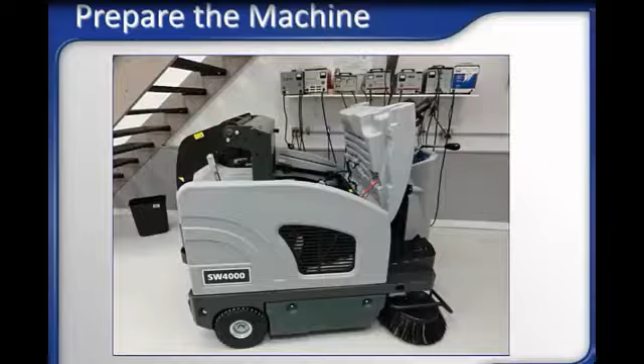If the SW4000 was properly stored, as will be covered later in this training, you should find the machine at the beginning of the shift in the following manner: machine parked with the seat propped up and the battery charger plugged into the machine, and machine reasonably clean with an empty hopper.

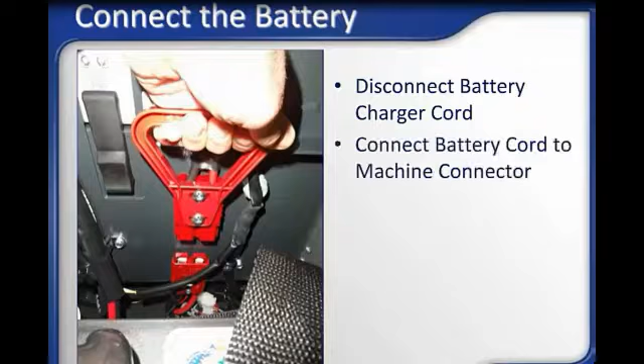Connect the battery for power. Disconnect the battery charger cord from the battery cord set. Connect the battery cord end into the connector on the machine as shown in the picture.

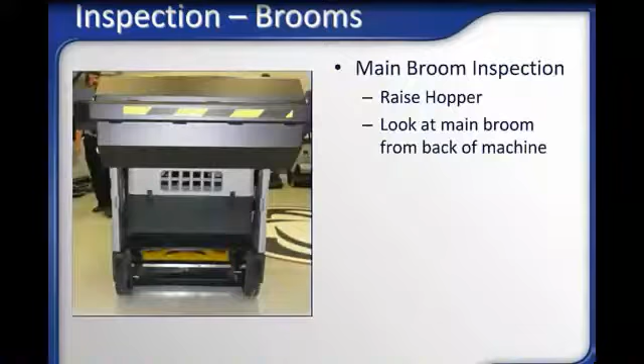The brooms are what do the debris sweeping work on a sweeper, so they must be in good condition for proper sweeping results. Inspect both the side brooms and the main broom. To see the main broom, raise the hopper and inspect the broom from the rear of the machine. To raise the hopper, you need to simultaneously press the hopper interlock switch on the dashboard and the hopper raise-lower switch just left of the operator seat.

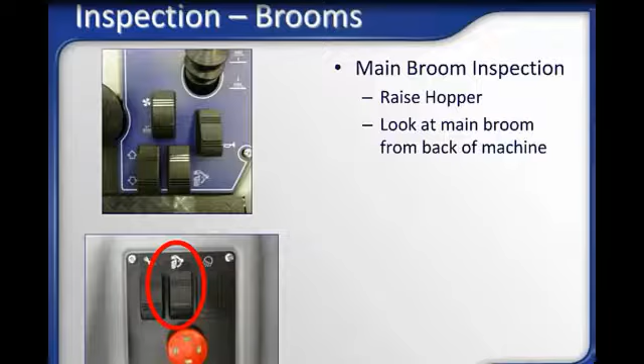Check all brooms for wear. The broom should be replaced when half of the original bristle length is gone, which is about 2 inches of bristle left for the main broom and 2.5 inches of bristle left for the side brooms.

Remove any wrapped debris from the brooms. If debris is wrapped around the broom, cut it out now. If heavily wrapped, it may be necessary to completely remove the broom to clean it off. Main broom removal is covered in the maintenance section of this training. Fully lower the hopper when broom inspection is completed.

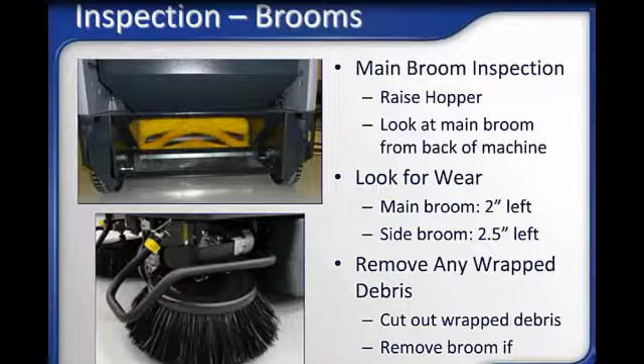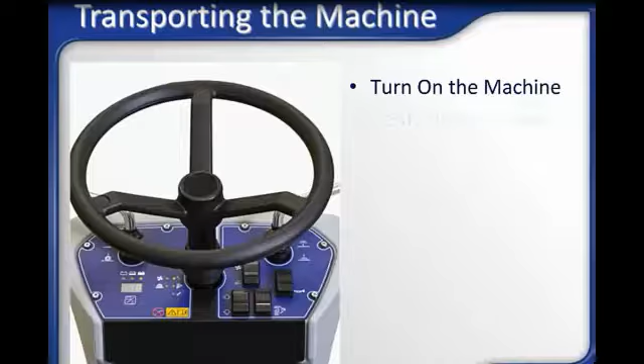Turn on the machine using the key, which is located just below the dashboard interface. Turn the key from the off position past the run position and release. Verify that the machine has enough battery power to complete the planned sweeping tasks using the control panel battery gauge. If fully charged, the indicator should be green.

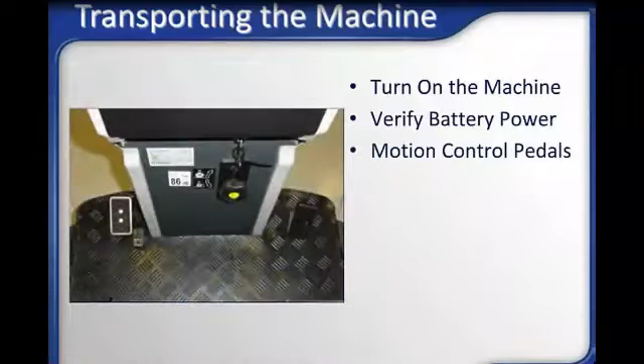There are 2 pedals on the floor of the operator's compartment that impact motion control: a brake with a parking brake function, and a variable speed accelerator pedal like in a car. The brake is typically only used for parking brake functions, but can also quickly reduce the machine's speed if needed. To engage the parking brake, press the brake pedal and engage the small lock to the bottom right of the brake with your other foot. To release, just press the brake again. Make sure the parking brake is released before trying to transport the machine.

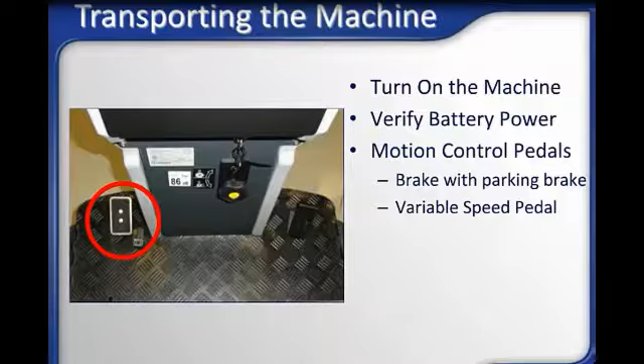On the dashboard is a travel direction selection switch. The default is forward when you turn on the machine. When in reverse mode, the machine will have an audible backup alarm sound. The SW4000 includes an operator presence switch in the seat that must be triggered by the weight of an operator to allow motion to begin.

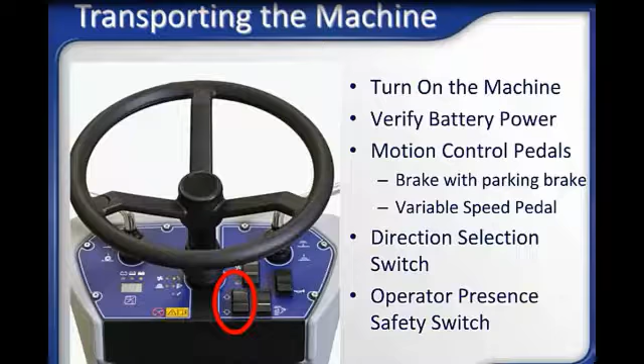Activation of the sweeping system: the SW4000 is designed to be simple and intuitive to use. The left side lever controls the main broom on and off. Pull the lever back to activate the main broom and push the lever forward again to deactivate it.

The right side lever controls the side broom on and off with the same on-off activation. The side brooms will not operate unless the main broom is also active. The SW4000 is designed with brooms-off-in-neutral functionality, which means brooms only operate when the machine is in motion, for safety, reduced noise, and increased broom life for lower cost of ownership.

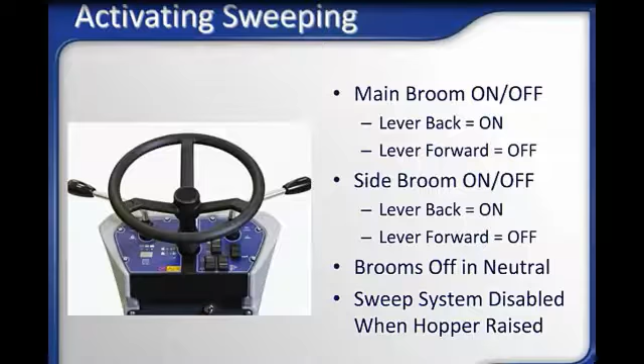If broom levers are in the active position, the brooms will begin operating once you press the motion control and begin moving. For safety, the sweep system will not operate while the hopper is raised. If brooms do not start as expected, verify the hopper is fully lowered. See the Maintenance section for adjusting broom height.

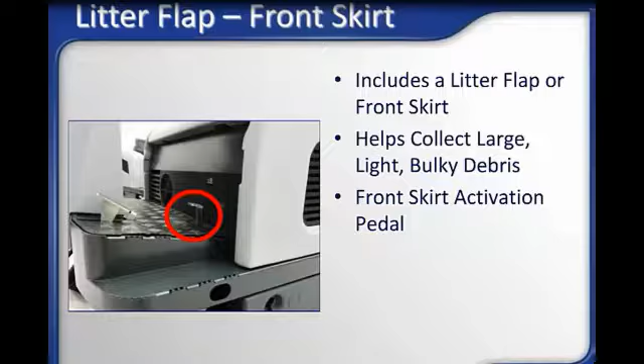The SW4000 includes a litter flap, or front skirt. This is an operator-controlled flap located on the front edge of the main broom chamber that allows the machine to more easily collect large, light, and bulky debris like leaves or facial tissues. There is a pedal just behind the brake that operates this flap. An operator should use their heel to activate this flap occasionally and momentarily while sweeping and before each turn to help capture light debris it may be pushing along.

Dust control: the SW4000 is designed with a vacuum-based dust control system. A switch on the dashboard controls the vacuum dust control system. The actual vacuum fan is located in the cover of the dust control panel filter at the rear of the machine. The default for the vacuum dust control system is on anytime the main broom is operating, since dust control should be regularly used.

The vacuum dust control switch can turn the vacuum off for wet sweep bypass, providing the ability to turn off the dust control vacuum system to prevent the filter from getting wet while sweeping in wet areas. Preventing the filter from getting wet will increase the life of the filter and greatly improve dust control when sweeping dusty areas. The same switch also controls the filter shaker.

It is a timed filter shaker with liberator functionality, which means multi-frequency vibrating systems for maximum dust removal from the filter, for increased airflow and better overall dust control. Activate the filter shaker every 10 minutes or so in dusty applications to help maintain good vacuum airflow.

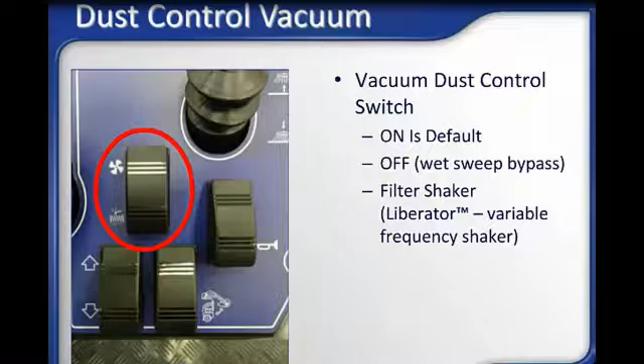If you experience poor dust control performance while sweeping, verify that the vacuum fan switch is turned on with the vacuum operating, and that the panel filter is in good shape, allowing vacuum air to pass through it. More about this will be covered in the maintenance area of this training.

Your machine may also include the optional DustGuard water mist-based side broom dust suppression system. This system consists of an activation switch, located just behind the operator's seat, two misting spray nozzles (one at each side broom), a water reservoir, and a pressure pump, which is internal to the machine.

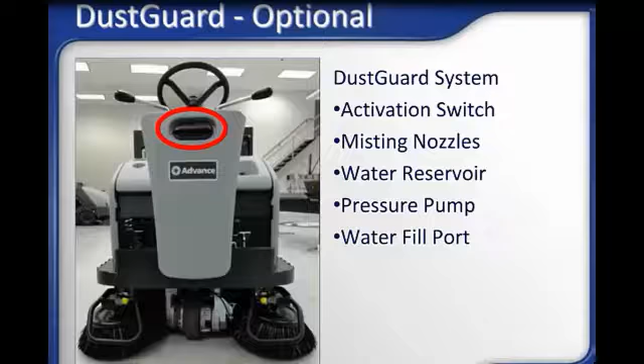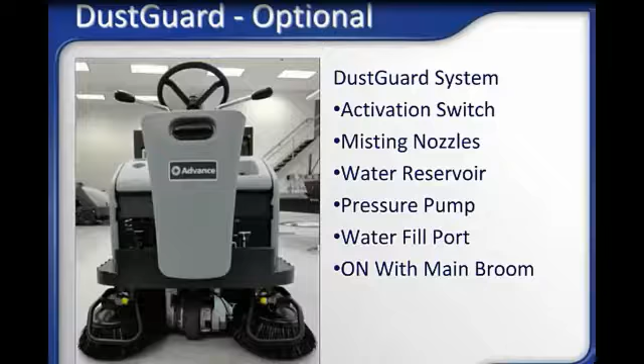Fill the reservoir with pure water in the indicated fill port. During sweeping, if the DustGuard switch is on, the DustGuard mist will start and stop with the main broom. If the misting tips do not spray an even, fine mist, they can be removed for cleaning. The tip and filter are located just behind the yellow cap. Service of the DustGuard system will be covered in the maintenance section.

If you have not used the DustGuard system in a while, or if the system was run dry, there may be bubbles in the lines. If they do not purge out when you first use it for a few minutes, you may need to remove the yellow spray cap and operate until water flows freely, then replace the cap.

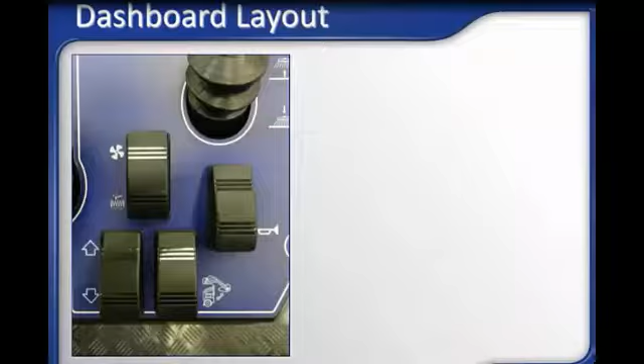Other items on the dashboard not previously covered include the horn and hour meter. If you hit the icon just below the readout, the display will switch from hours of operation to battery voltage.

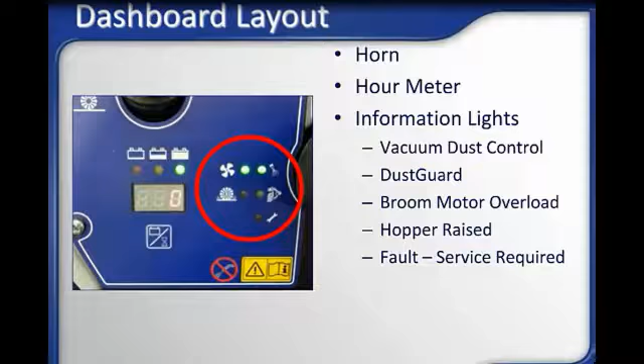Information lights inform you that the vacuum dust control fan is set to active, DustGuard is set to active, the main broom is in overload (reduce the main broom down pressure when this happens), the hopper is not in the fully lowered position, thus brooms will not operate, and that a fault has taken place and service is required.

If the optional headlight is installed, this switch will activate it, and finally, the emergency stop. Note: if the machine ever does not function as expected, verify the e-stop is not engaged by twisting the switch.

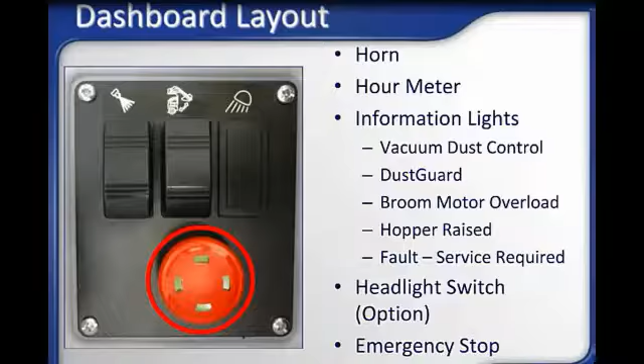To help maximize productivity and achieve great cleaning results, here are some tips. Plan out and use an organized and logical cleaning route to optimize your sweeping coverage. Keep a consistent overlap. Use the dust control system to minimize fugitive dust emissions. Minimize backing up, since this can leave debris behind. Use the litter flap before each turn to help prevent losing debris on turns. Look behind you regularly to confirm the floor is being properly swept and that you are not trailing debris, which typically indicates the hopper is full.

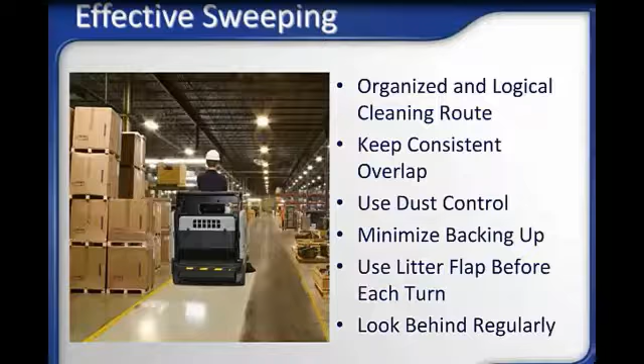When should you stop to empty the hopper, or dump, as it is often called? It is good practice to empty the hopper after each shift of sweeping to prevent odors and have the machine ready for the next shift. You also need to dump when the hopper is full and you start trailing debris behind the machine. Steps to empty the hopper.

Turn off the sweeping system. To raise the hopper, you need to simultaneously press the hopper interlock switch on the dashboard and the hopper raise/lower switch just left of the operator seat. This machine uses a safety interlock system to assure hands are clear of the hopper arms when raising and lowering the hopper. The hopper can be emptied low or into a dumpster with clearance heights of up to 62 inches.

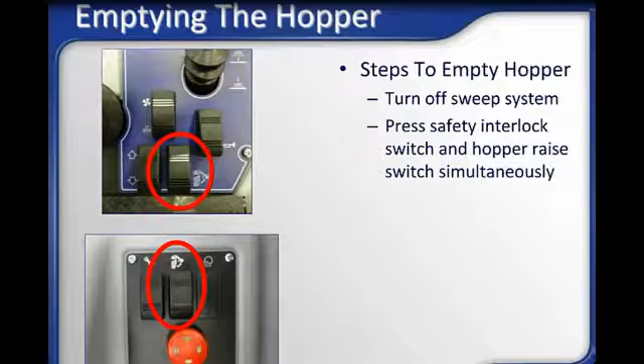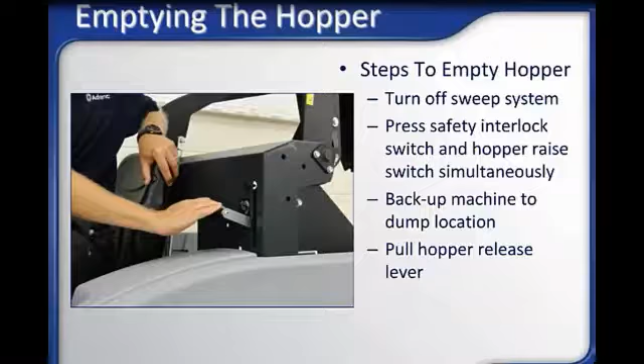Back up the machine to put the hopper over the location where you wish to empty it. Pull the hopper release lever located just behind the operator's left shoulder, which will allow the hopper to pivot down and empty its contents. The hopper clearance is lower when the hopper is released, so make sure to reset the hopper with the handle shown in the picture to avoid catching the hopper on the dumpster if there is not sufficient clearance.

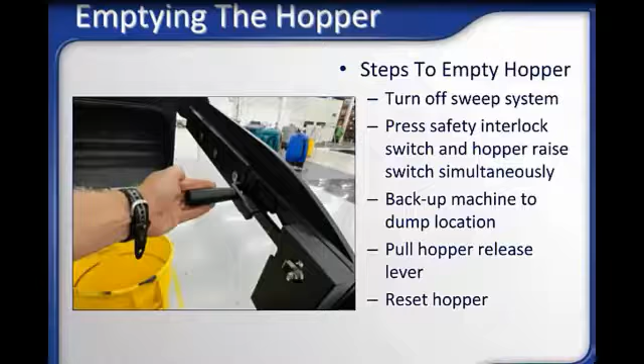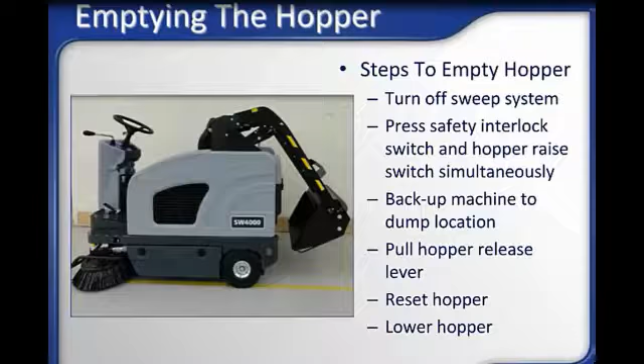Lower the hopper using the interlock buttons again. If the hopper is not reset to its pre-dump position, it will automatically reset when it lowers into the machine without damage. You are now ready to resume sweeping.

Eventually, the area to be swept will be completed so you can prepare the machine for work the next day, or the battery will become depleted and go from green to yellow on the battery gauge indicator on the control panel and will need to be charged. As the battery gets low with the indicator going yellow, the sweeping system will turn off, but the transport mode will still be functioning so you can travel back to the storage and charging location.

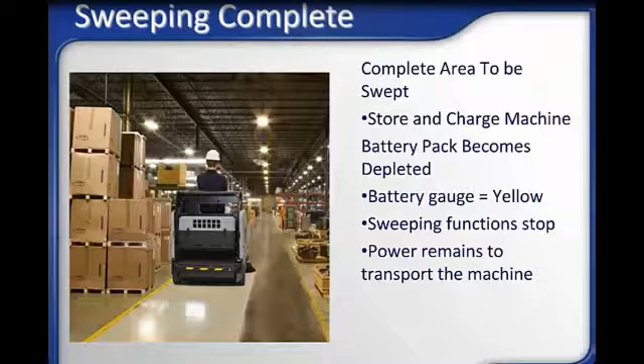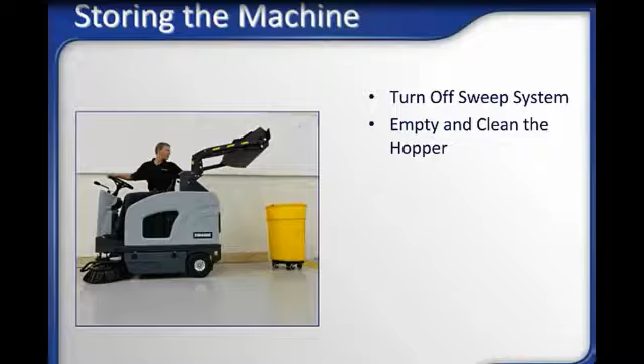Storing the machine at the end of the shift: first, turn off the sweep system and raise the brooms off the floor by pushing both activation levers forward. Empty the hopper as covered previously, and if wet debris was swept, washing out the hopper to prevent dry buildup and unpleasant odor is recommended.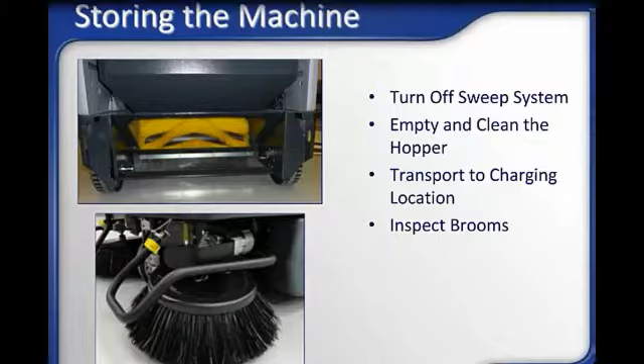Transport the machine back to storage and charging location. Inspect brooms and remove any wrapped debris or replace them if they are worn. Open the seat compartment and prop it open. Disconnect the battery cord connection from the machine and connect it into a proper battery charger connection to charge the batteries for the next cleaning shift.

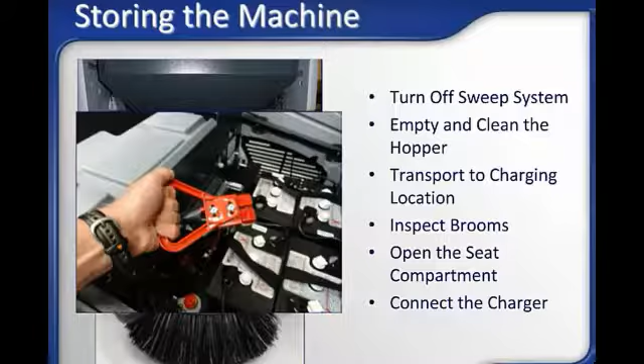It's a good idea to take a wet rag and clean off the exterior of the machine to keep it looking great and clean. After charging, the machine should be ready for the next shift of cleaning.

This section of the training will look at how to maintain the SW4000 to keep it performing properly for years of service. Scheduled Maintenance Tasks Table.

This image is from the operator's manual that was provided with the machine. Take a moment to read through the tasks and the frequency of these tasks. A few of the most common maintenance tasks will now be covered. For more detail on these tasks, or for detail about maintenance not covered in this training, contact your advanced service dealer or consult the service manual.

In addition to the specific maintenance tasks, it is a great idea to complete a machine walk-around each day, specifically looking for anything that is not correct on the machine. Addressing found issues quickly will improve machine performance and increase the life of the machine. Never operate the machine if safety issues are found.

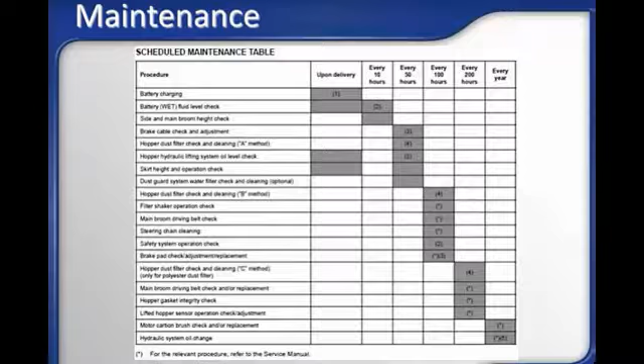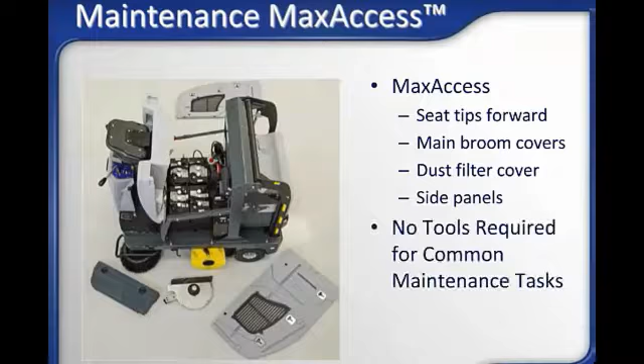The SW4000 is designed with service access in mind. As you can see in the picture, the max access design allows full access for maintenance of the machine, and most regular maintenance tasks can be accomplished without tools.

Broom height adjustment: for the optimal combination of excellent sweeping performance and long broom life, the brooms should be set so bristles are flicking the ground. Setting the brooms too low will only result in additional battery draw and reduced broom life.

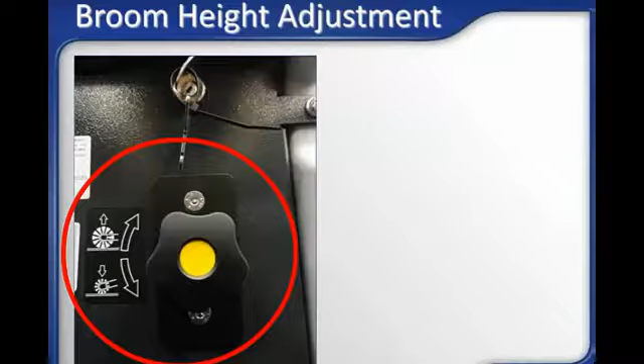Main broom height setting: find a clean, flat spot on the floor and drive the SW4000 machine to it. Activate the main broom by lowering it and tapping the motion pedal while holding down the brake pedal. The goal here is to prevent the machine from moving so the broom will leave a polish pattern on the floor. Raise the main broom and pull the machine forward.

The polish pattern should be between 0.8 inches and 1.6 inches. If too narrow, turn the main broom adjustment knob counterclockwise and retest. If the polish pattern is too wide, turn the knob clockwise and retest to assure the broom is at the proper height.

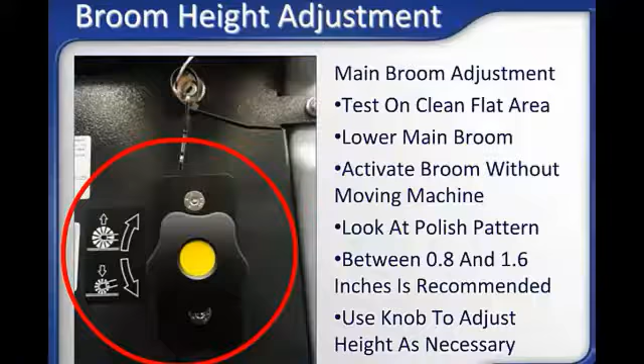Note that for unlevel surfaces, the broom will need to be set lower to assure the lowest points on the surface are swept. Side broom height adjustment.

Use the side broom activation lever and lower the side brooms. Verify that the side brooms are just lightly brushing the surface and not heavily digging in and bending the bristles. The side brooms do not sit flat on the floor like a scrub brush, but are intentionally tilted forwards and towards the inside of the machine. This is factory set and should not need to be adjusted.

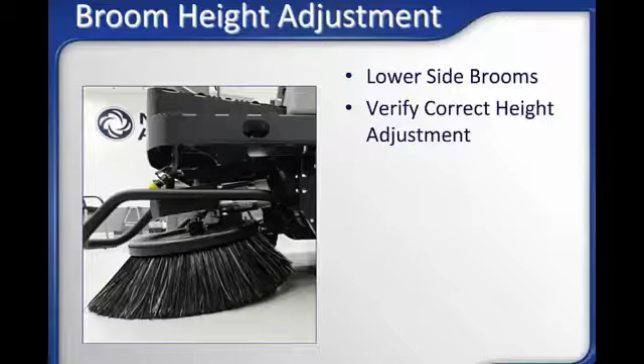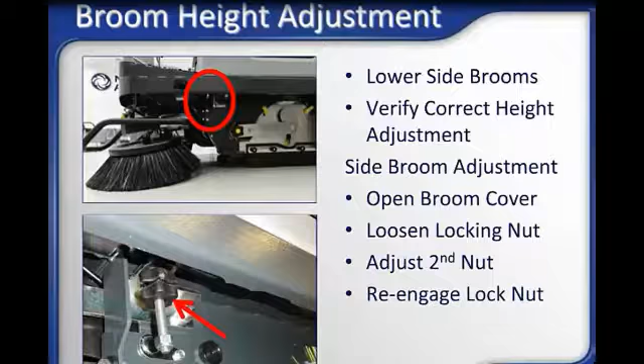To adjust the side broom height, open the latches to the main broom access doors and tip out and remove to expose the adjustment nut for the side brooms. Loosen the locking nut, adjust the second nut so the broom is at the right height, then re-engage the locking nut to hold the original nut in place again. Replace the broom access door cover. Repeat for the second broom.

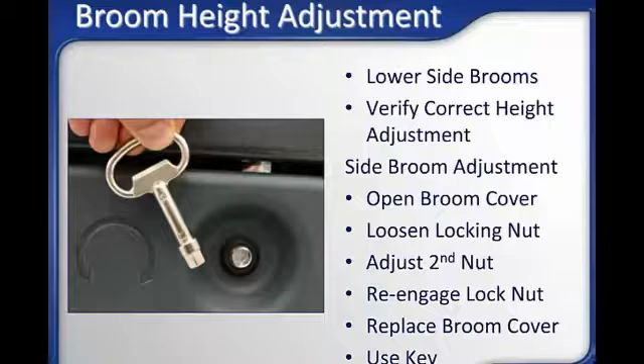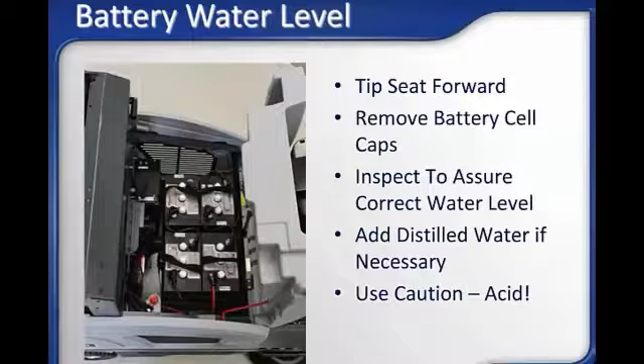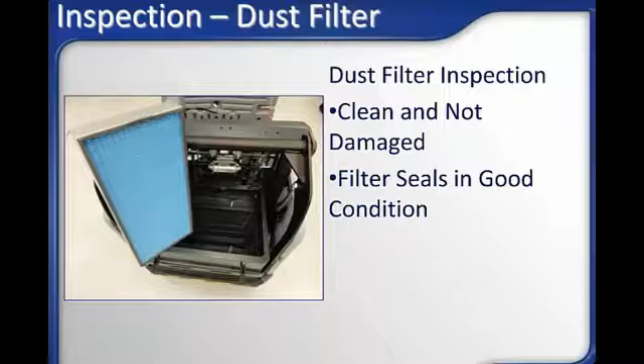Dust filter inspection. A poorly maintained dust filter will greatly increase the amount of fugitive dust a sweeper releases, so a properly maintained filter is a must to assure good dust control. Remove and inspect the panel filter to ensure it is clean and not damaged and that the filter seals are in good condition. Replace the filter if necessary. The process for accessing the filter is covered next.

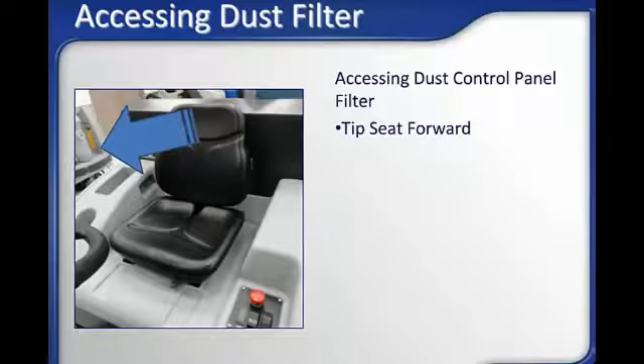Accessing the dust control panel filter. Tip the operator seat forward. Disconnect the fan power cord electrical connection. Release the 4 latches for the filter cover, 2 shown here and 2 at the rear of the cover, and lift the cover off and set it aside.

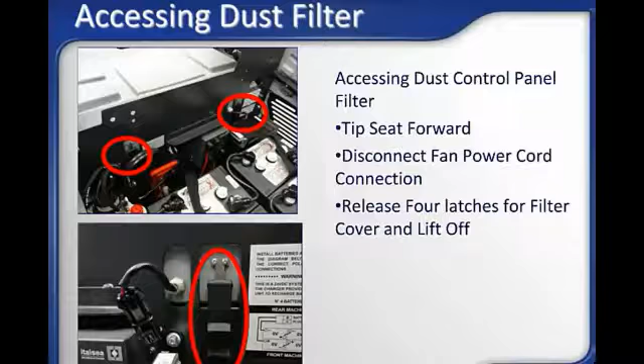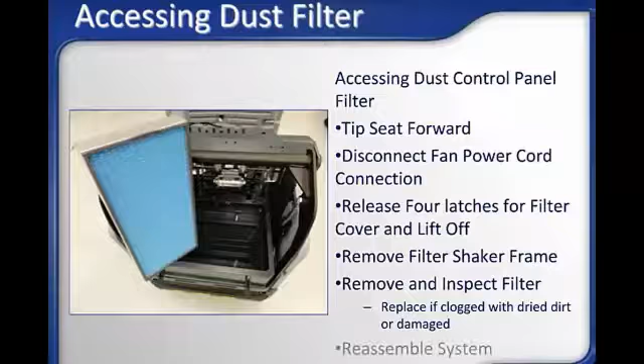Remove the filter shaker frame by loosening the 4 black knobs. There is a convenient storage position for this frame once removed from the lockdown position. Remove and inspect the filter as described previously. Replace the filter if it is clogged by dried dirt or damaged. Reassemble the system, being sure to reconnect the electrical connection so the fan will run.

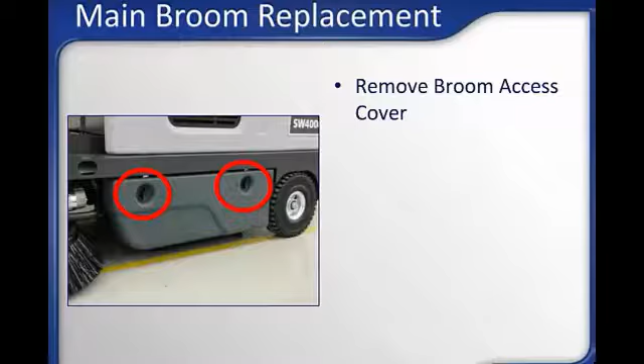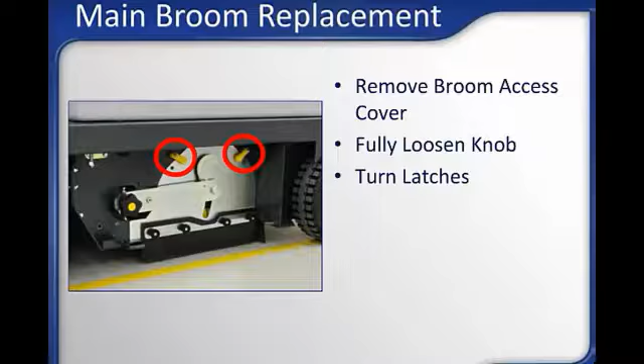Main broom replacement. After safely parking and turning off the machine, remove the main broom access door cover by opening the 2 latches at the top, pivoting the door out, and removing it. Fully loosen the indicated knob that holds the broom in place. Turn the 2 indicated latches so the door can be pivoted out and set aside.

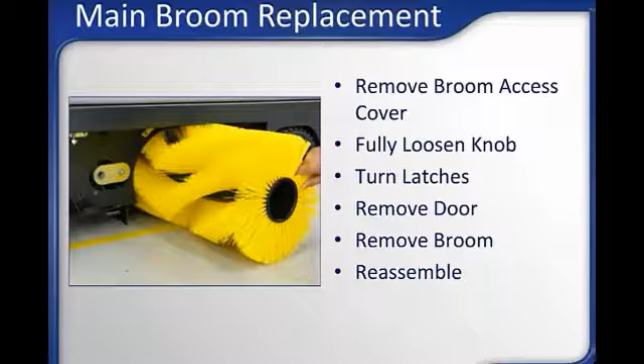Pull out the main broom. Reassemble in the reverse order. Reassembly is more simple if the broom activation lever is in the on position, lowering the broom mechanism to the floor. Also note that the broom must be installed with the hexagon-shaped opening in the broom core towards the inside.

Side broom replacement. After safely parking and turning the machine off, remove the locking pin shown in the picture. No tools are required for this operation. Slide the broom off the drive shaft and replace it. Reinstall the locking pin and repeat the operation for the second side broom.

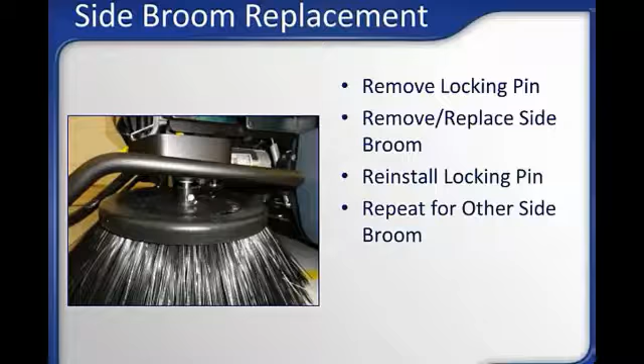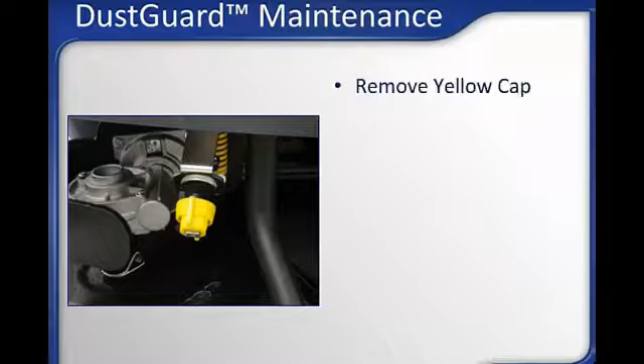DustGuard maintenance. If the optional DustGuard system is not giving consistent spray, the filter and tip should be cleaned with the following process. Remove the yellow cap at the DustGuard spray head by twisting it a quarter turn. Remove the spray nozzle and filter, then clean the spray nozzle and filter. Soaking the spray tips in a light acid or lime and scale removal solution can help remove any calcium buildup. Reassemble the filter

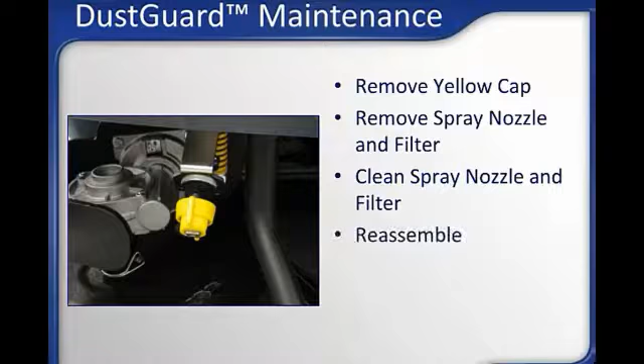and tip and cap system.

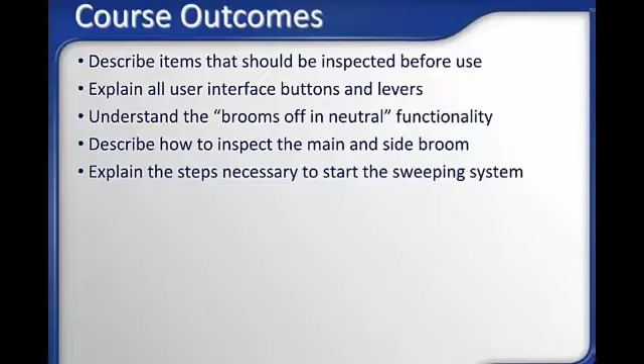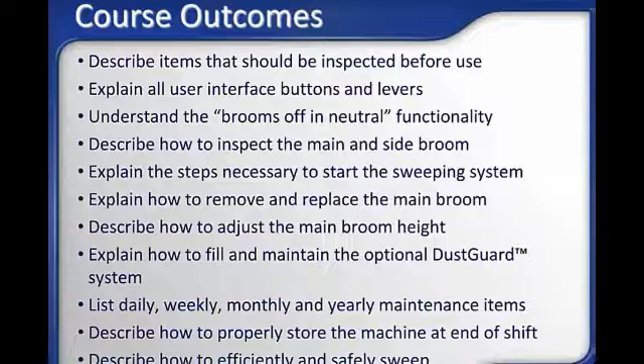By successfully completing this training module, you should now be able to list items that should be inspected before use, explain all user interface buttons and levers, understand the brooms off in neutral functionality, describe how to inspect the main broom and side broom, explain the steps necessary to start the sweeping system, explain how to remove and replace the main broom, describe how to adjust the main broom height, explain how to fill and maintain the optional DustGuard system, list daily, weekly, monthly, and yearly maintenance items, describe how to properly store the machine at the end of shift, and describe how to efficiently and safely sweep. The instructional portion of this training module is now complete.